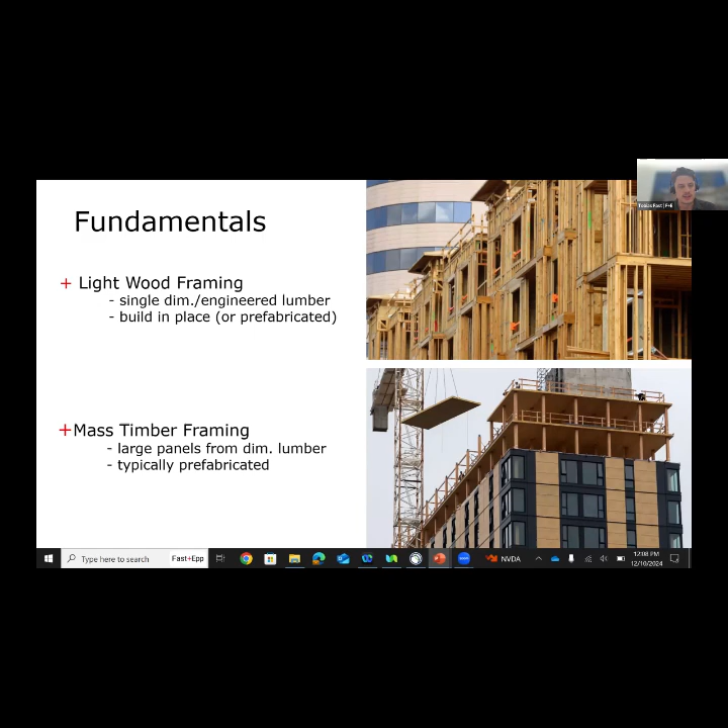Lightwood framing uses dimensional lumber, built in place, with some perhaps levels of prefabrication. Mass timber is large panels made from dimensional lumber. You're looking at very similar materials in the top and bottom photos, but one is prefabricated, one is larger dimension elements, with longer spans, higher capacities, and bigger buildings.

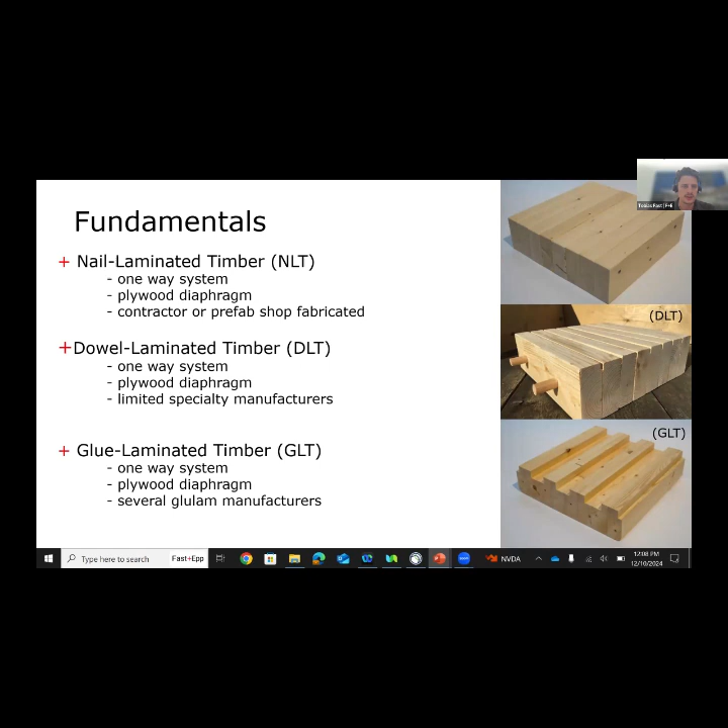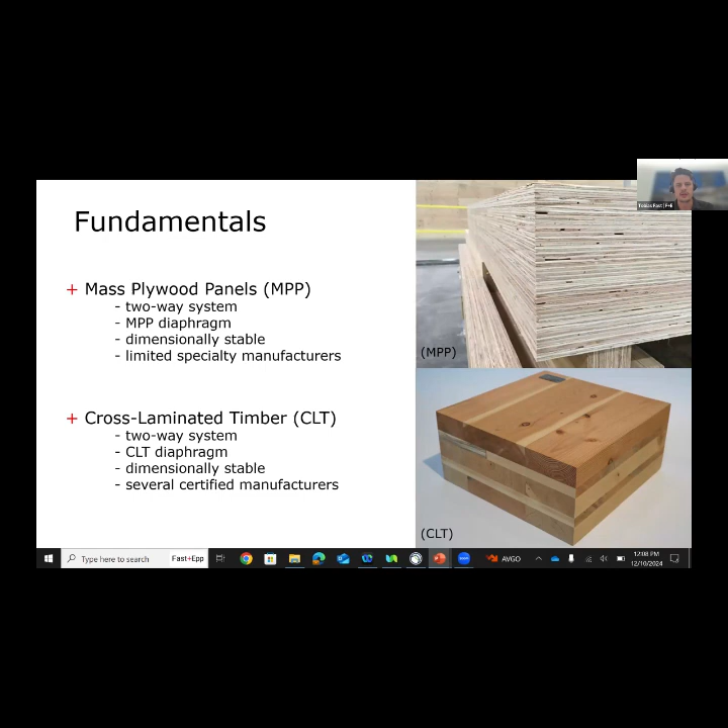You can break down mass timber as a broad word into a couple different panel types or material types. There's nail laminated, dowel laminated, glue laminated—all sorts of ways of laminating these things. Plywood is stick plywood glued together, and then there's cross laminated timber. These all make up what we call mass timber, and they're all fundamentally structural elements that compose a building's primary load-bearing structure. I won't go into depth on these, but these are different subcomponents of that space.

As far as gravity systems go, there's a range, but in general the bulk of buildings you'll see are formed in one of four ways. First is post and beam—it's kind of the traditional mass timber format, what you'd probably see down in old Gastown buildings, right? It's post and beam, a very simple construction type.

Full panel is a newer one—or the advent of it happened maybe several decades ago—but a larger, broader market share of full panel suppliers and producers now enables panels for floors and wall elements. Stick and panel is a nice hybrid, and you're seeing that around town with stick frame walls and mass timber panels for the floors. And then post and panel is something I'll share examples of shortly—it's sort of what you might compare with the traditional cast-in-place flat plate concrete systems.

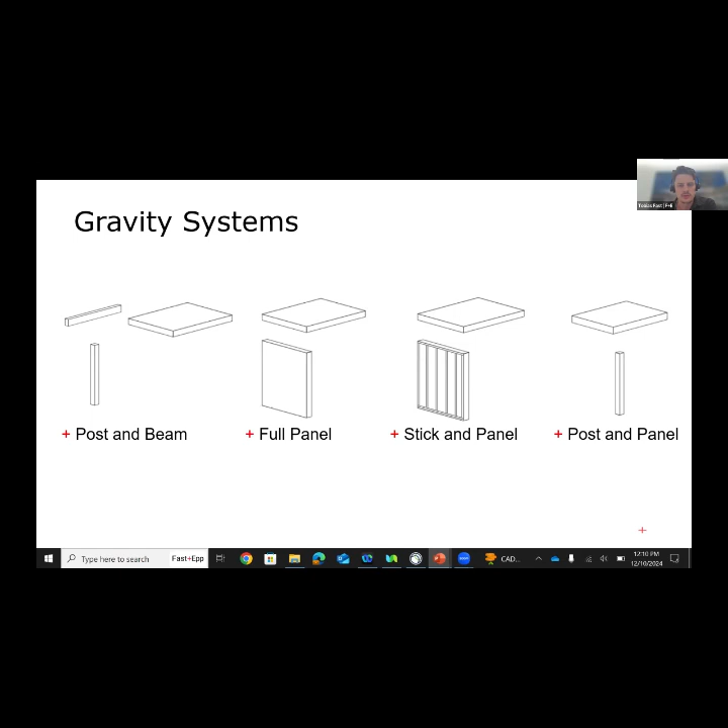That's being used in a lot of multi-unit residential mass timber construction right now. Grids are very important in this space.

Typical residential grids for a point support system, that's the last system I showed on the far right of the last slide. These are smaller grids, like 11.5 by 15. This is all dependent on the supplier and what they can produce. This is with no beams on the left-hand side.

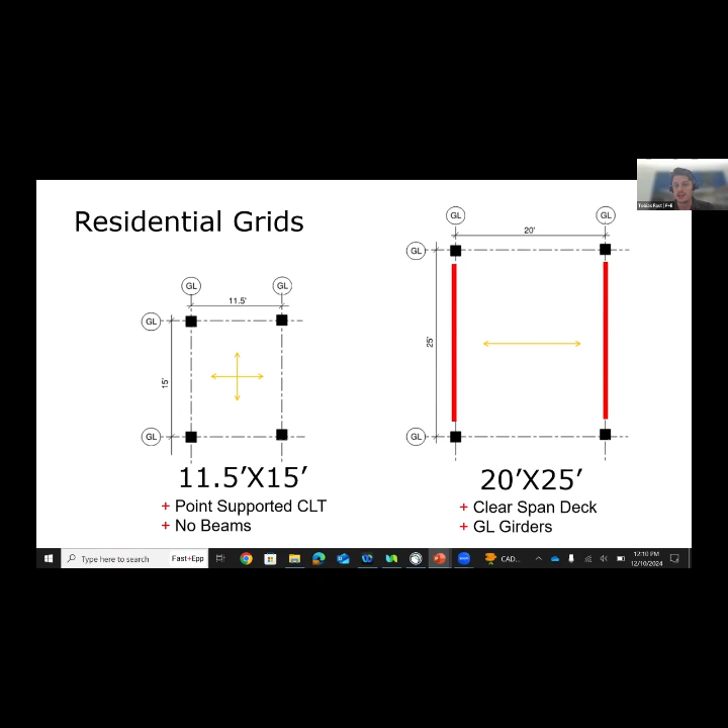You see more traditional post and beam grid, and it can get larger to 20 to 25 foot spacing. This is more in line with what you'd see in concrete construction, steel construction.

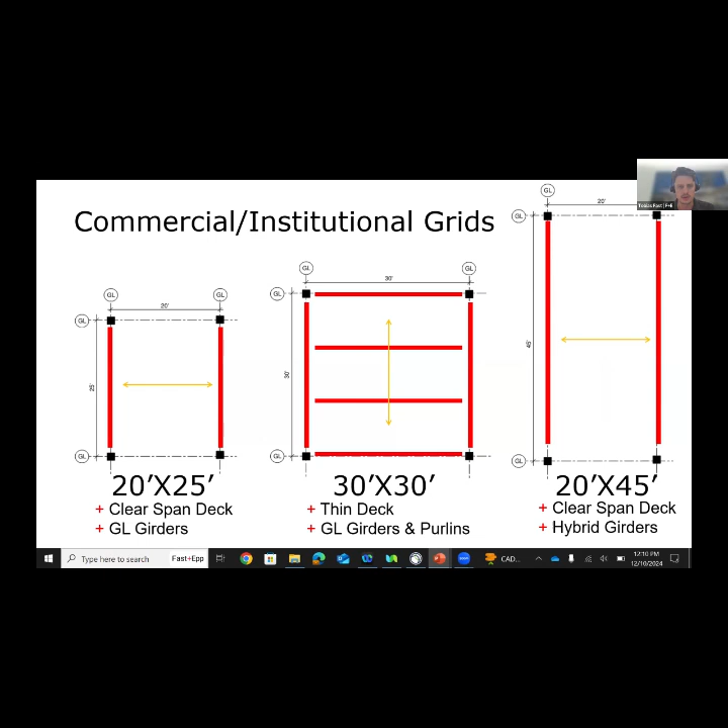On the commercial side, then you're going larger, you're going all primarily beam type systems, 20 by 25, 30 by 30, even larger if you really want. But really, the left two are kind of what you would see most commonly. These are traditional grids, what you'd see in the concrete and steel space.

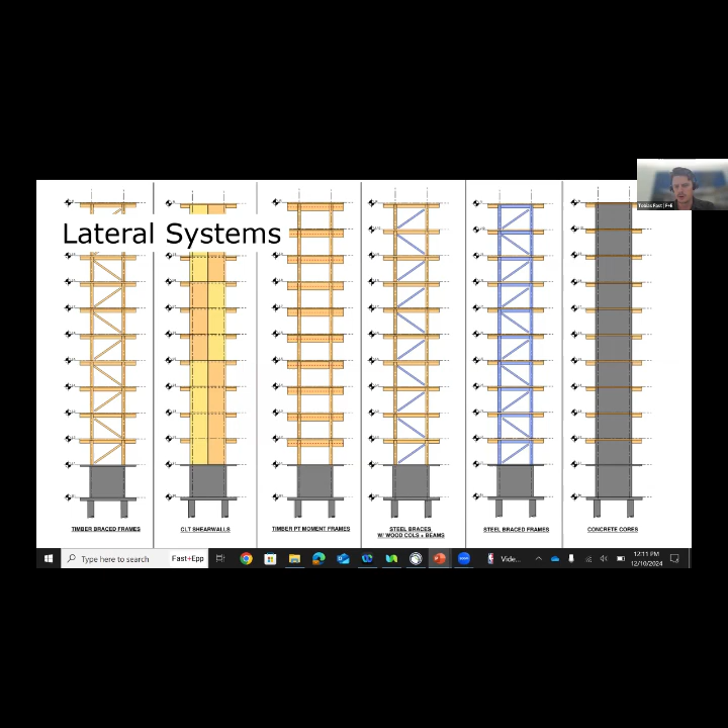But you can do timber frame systems. I'll show you one in a second. Primarily you'll see concrete core and steel frame systems.

Timber brace frames, you can see here, pretty self-explanatory. CLT shear walls for smaller sort of squat buildings - this is a nice way where the entire structure is just wood. We're doing this as the elementary school in the lower mainland.

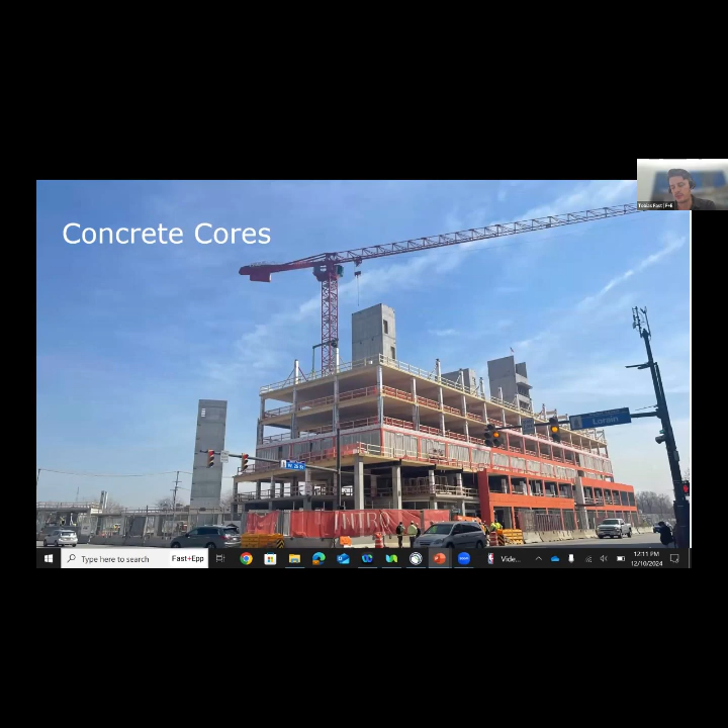Steel brace frames, we all know about this. And then concrete cores, like I said, especially in Vancouver, make up the bulk of lateral systems, even for timber structures.

Okay, structural connections, how they actually get connected together. There's myriad ways these buildings can come together, and columns and beams can get connected. I'm showing one type here.

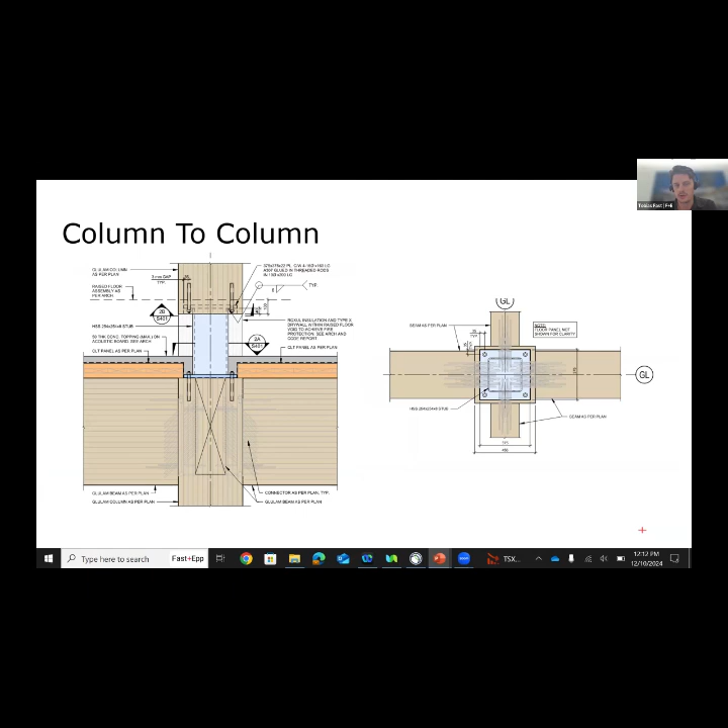These are form-fit hangers. You use these kinds of systems. These are pre-engineered systems, and really allow for no visual impact - you don't see anything, all you see is wood to wood. So that's a benefit. There's other systems, bearing systems.

On the positive side, you really have flexibility - if you have architectural preferences, if you have fire rating preferences or requirements, if you have fabrication considerations, one fabricator prefers one, you can go many different directions. Downside is there's not a lot of standardization right now.

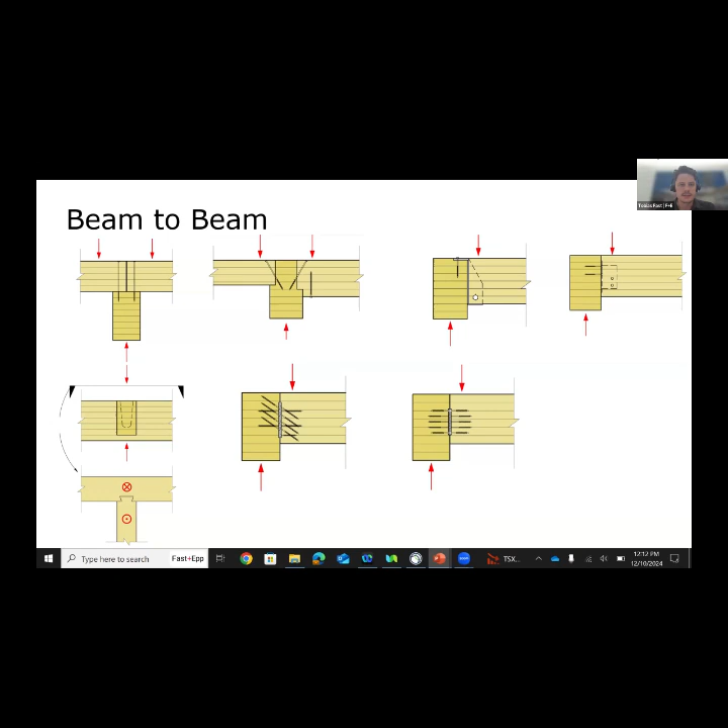And so look, all of these are possible. You have different screw kinds, screw types. It's just a bit of an open market in this space right now, but many different ways these can come together.

Here's an example of a form fit hanger with a Ricon. A lot of these came out of Europe - Central Europe, Germany, Switzerland, Austria - and have now made their way over here, as well as some new connectors on the market by local suppliers.

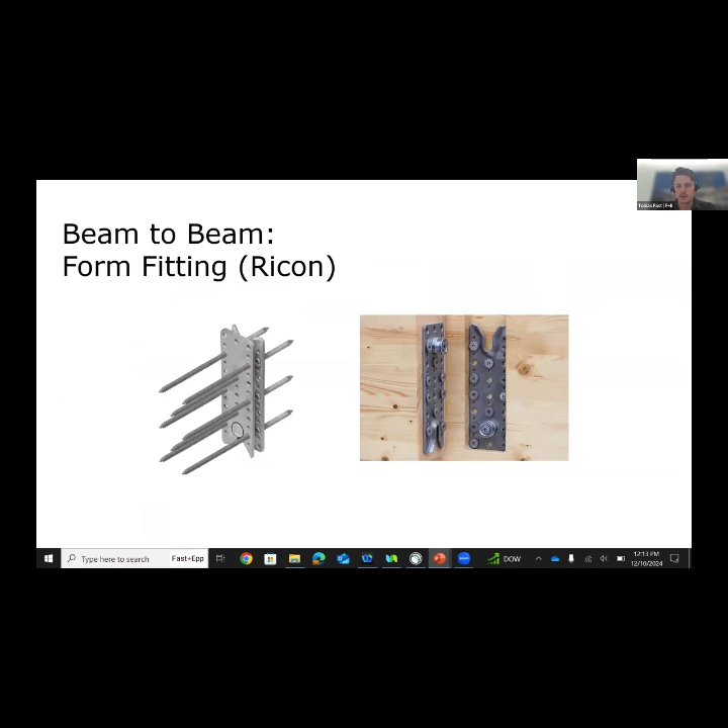Column base is just fairly simple - just get the load to the ground. Generally, some manner of steel or aluminum is involved in the connections here.

Okay, into supply considerations. So these all come from logs, and we have a big, massive forestry industry here in British Columbia, obviously. However, that doesn't give you the full picture. A lot of the timber projects here are supplied locally, but certainly not exclusively.

Throughout Canada, we have Nordic, Element 5 out on the East Coast, Western Archrib supplying Glulam from Alberta. In the United States, you've got some more options, including several just south of the border. And in Europe, there's a whole other range that's been going on much longer than it has in North America, so the supply market's a bit more mature and developed there. It's not out of the picture for these suppliers to bid competitively on projects in North America, especially on the East Coast more so than the West Coast.

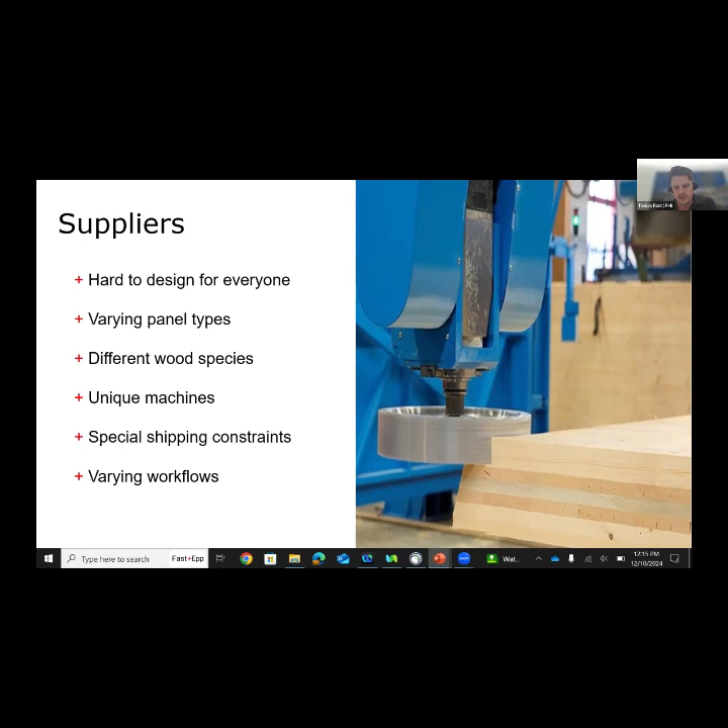Shipping comes into it too. These panels are often limited by keeping elements within the size of standard shipping lengths, widths, and heights. So even though the panel supplier can supply something bigger, the truck is often the limiting factor.

Anyway, there's a whole world in there. We've got only a handful of minutes here, so I won't get too deep into that, but I want to look at a few case studies which might be of most importance here.

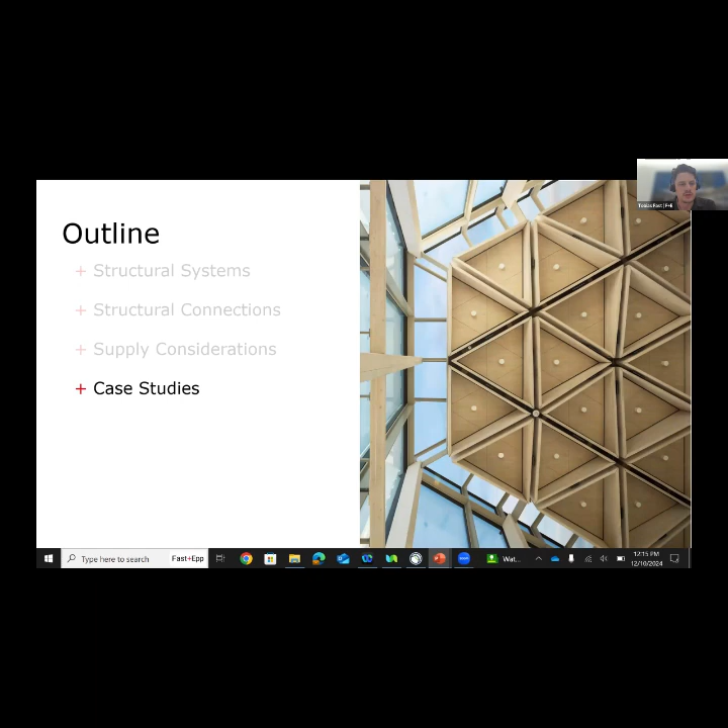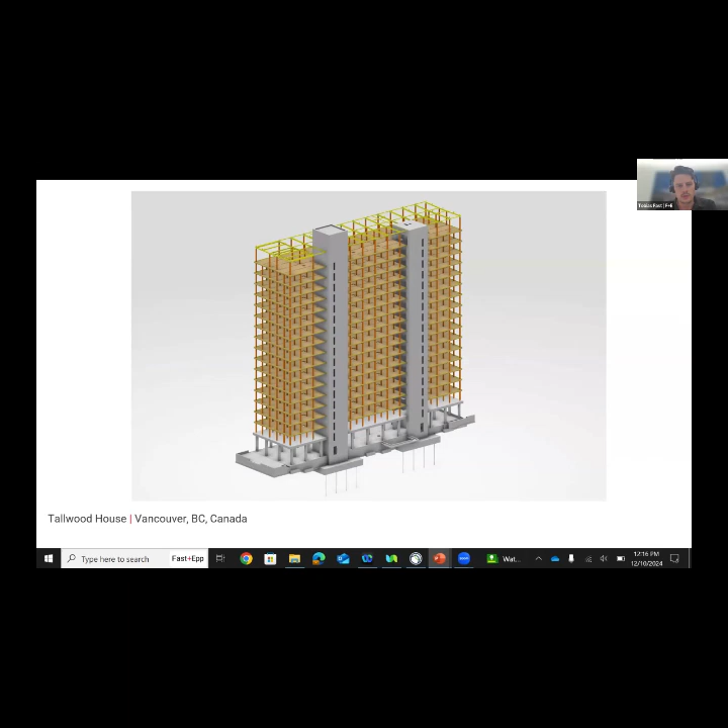The first one is an older project, as far as mass timber in the Vancouver area goes—getting close to 10 years now—this project was topped out. This is Tallwood House at UBC campus in Vancouver. You've probably heard about it; it was the tallest mass timber structure in the world at its time, before being eclipsed by a Norwegian project. This was all using point-supported CLT.

This is a student residence building, and you'll see this often for developers considering multi-unit construction taller than 6 stories. This is a good option. You see a lot of columns, set at the edges of the panels, so it's your panel width that determines the grid of columns you'll have.

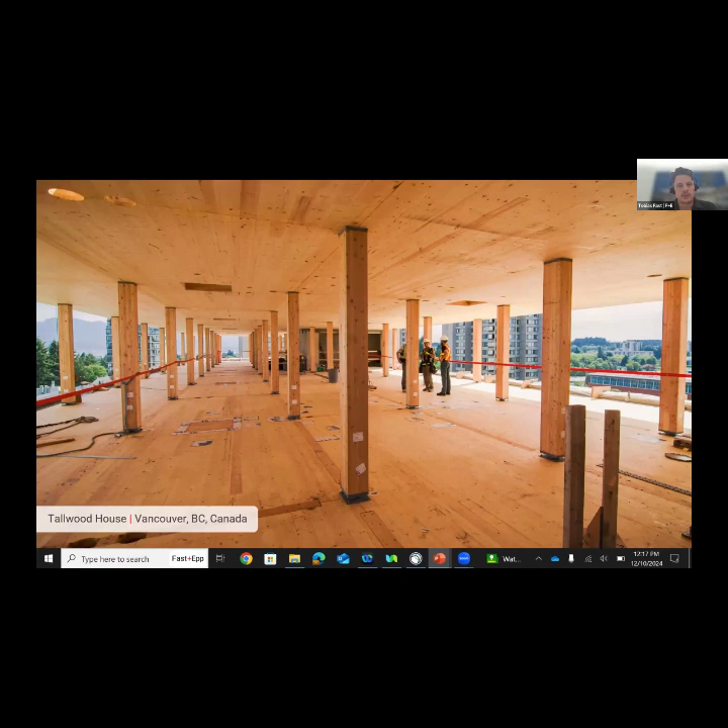This is a beamless system, and it gets as close as possible to that 3 meter Vancouver classic, or 2.9 to 3.0 meter floor-to-floor height. That's with roughly 6 to 7 inches of CLT for your floor structure, with topping on top.

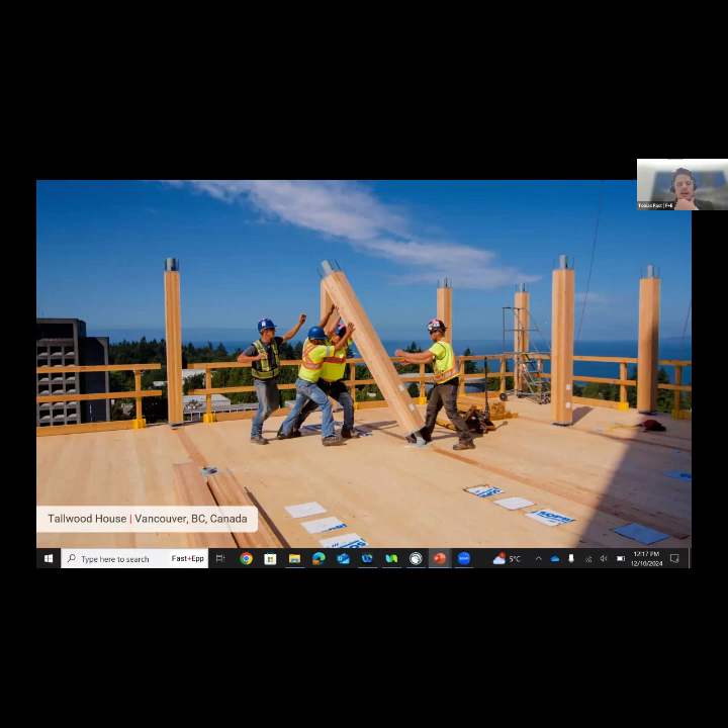This building was very successful. It came in quite competitive against cast-in-place concrete, which was the benchmark for it, and really set off quite a large movement in this space. Prefabricated wall panel systems all went together quite nicely and quickly.

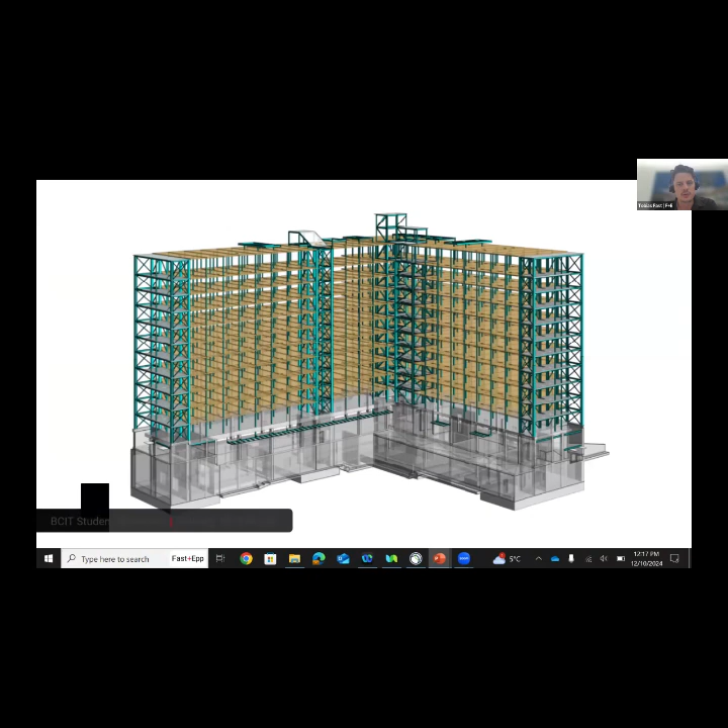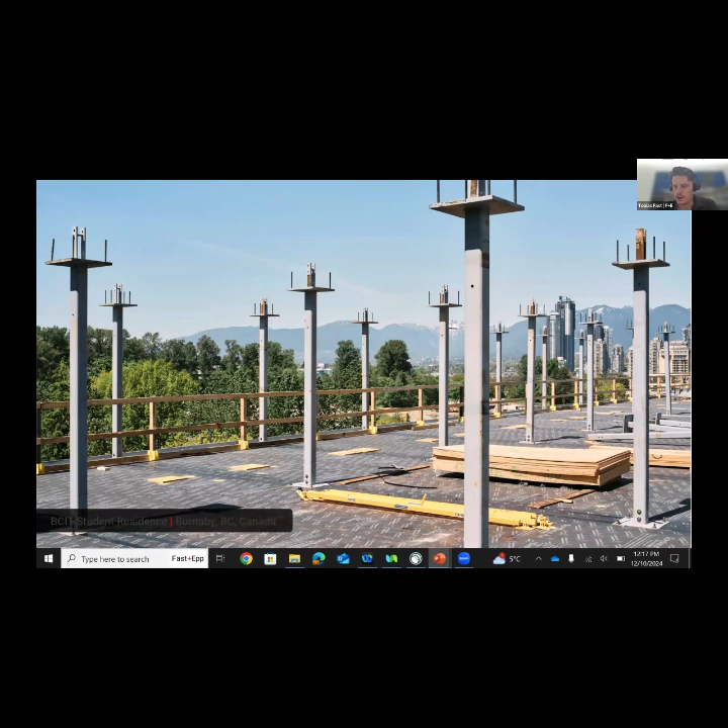I'll keep going, I think I'm running behind here, but this is BCIT—sort of a second generation project. This is the student residence building which just topped out recently on the structural side. This is 11 stories, out at their Burnaby campus. This is the same system except with steel columns, which allows narrower dimension columns that fit within the partition walls. You can see all the columns stood there, single-story columns, 4 bolts for the connection to the next column.

Waterproofing on this project was the Cadillac version, the highest level of temporary moisture management, which is a big deal as many of you know. A fair amount of money was spent on this one, and it worked well—shop-applied membrane, sealed the splines, checked the moisture content before sealing things up, all that good stuff.

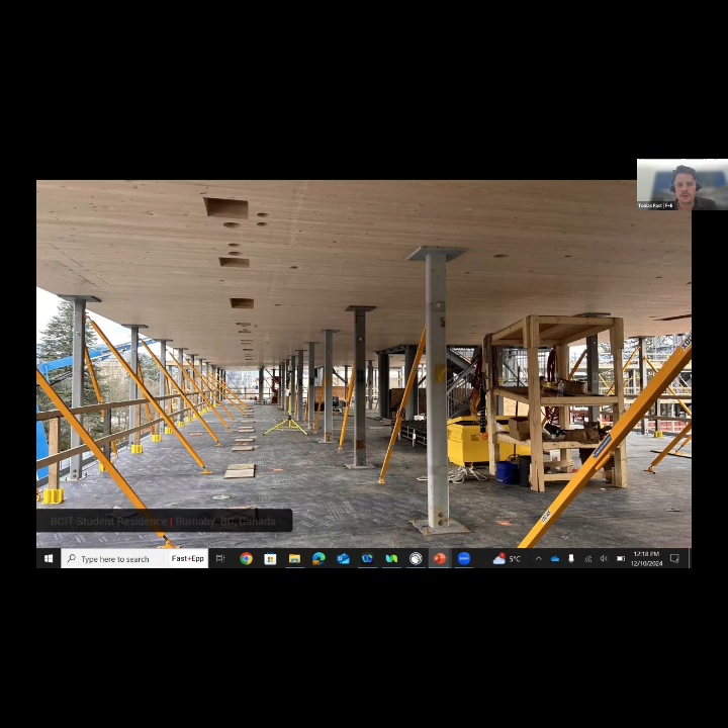Steel braced core on this one. The whole core was prefabricated ahead of time, in 2 lifts, I think—4 stories roughly per lift—and then installed in time so the crane could be done.

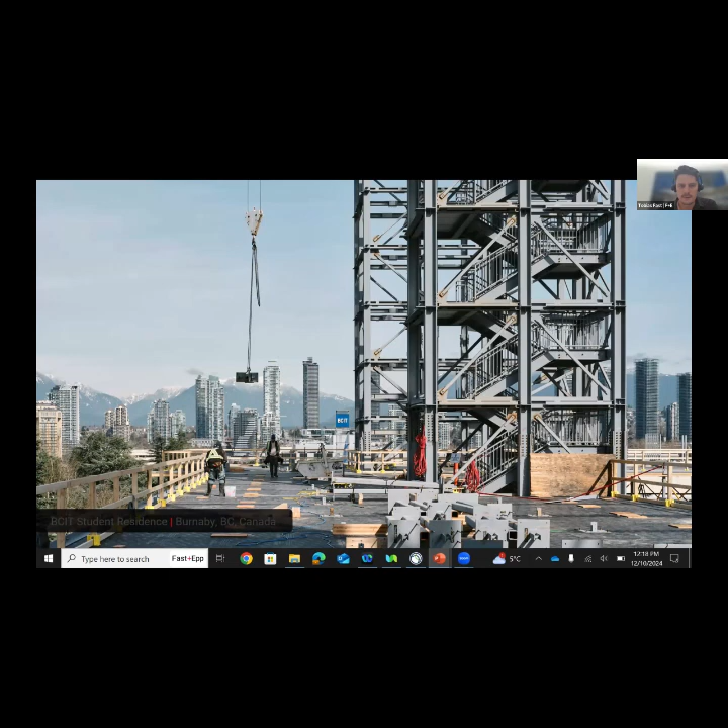And could focus on flying timber panels and steel columns like you see here. The Flynn speed wall system for the exterior curtain wall went really well.

That's the sort of small unit residential space for student housing, social housing, smaller condos—that's where you'll see that. There are a few more of those in the mix right now in various stages of design with private and public clients. Lastly, I'll talk about the Hive.

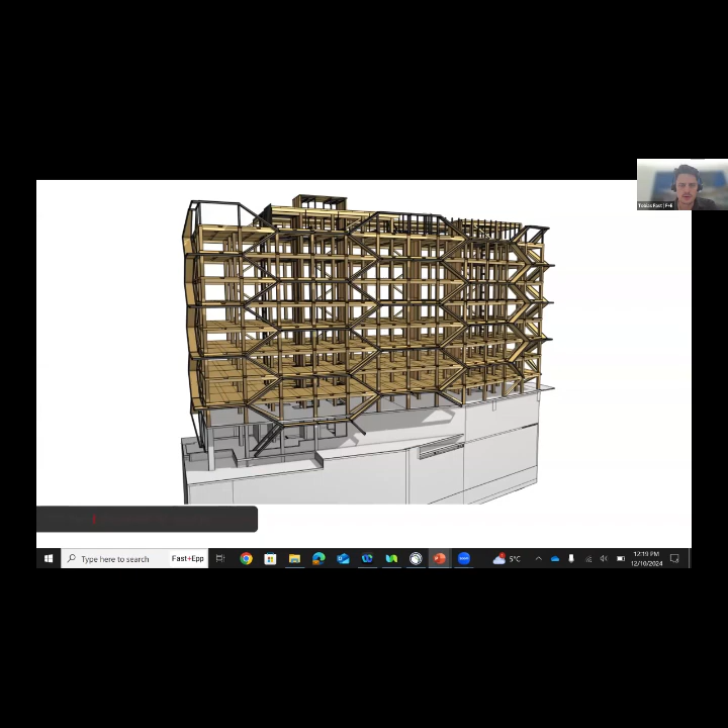This building is structurally topped out now. This is in East Van here, and this is an all timber—there's some hybrid elements, but primarily a timber structure. This is where ICBC is going to be moving in. It's been developed by the Nature's Path group. This is glulam timber installed on site by the iron workers.

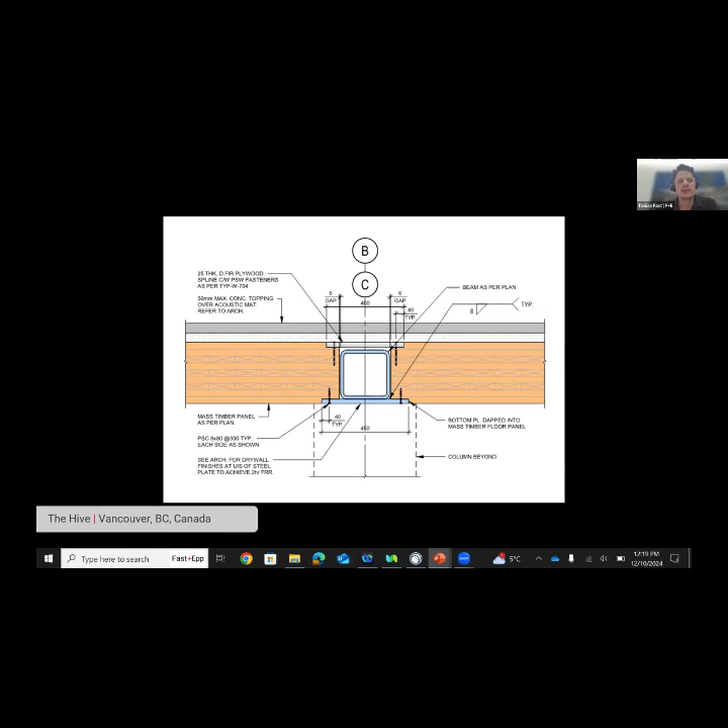Clear spans all the way across the quarters, a three-bay building. There are flush steel beams—custom fabricated to support the panels at the edges, or the inside, I should say. It's a steel or timber braced frame system, the tallest timber lateral system in a high seismic region right now. Quite innovative. These innovative dampers, which we also have in our building here, Fast + Epp's home office building, allow high levels of energy dissipation for a damage-free structure post design earthquake event.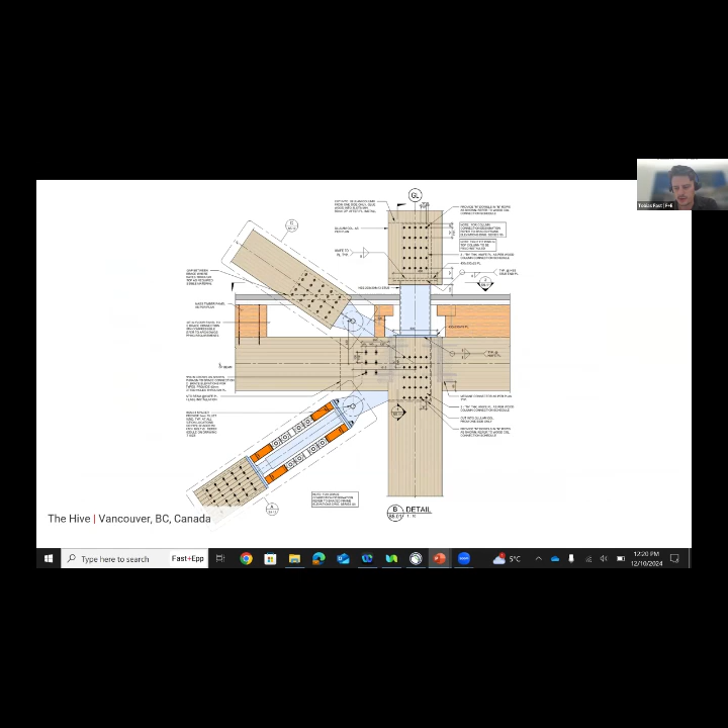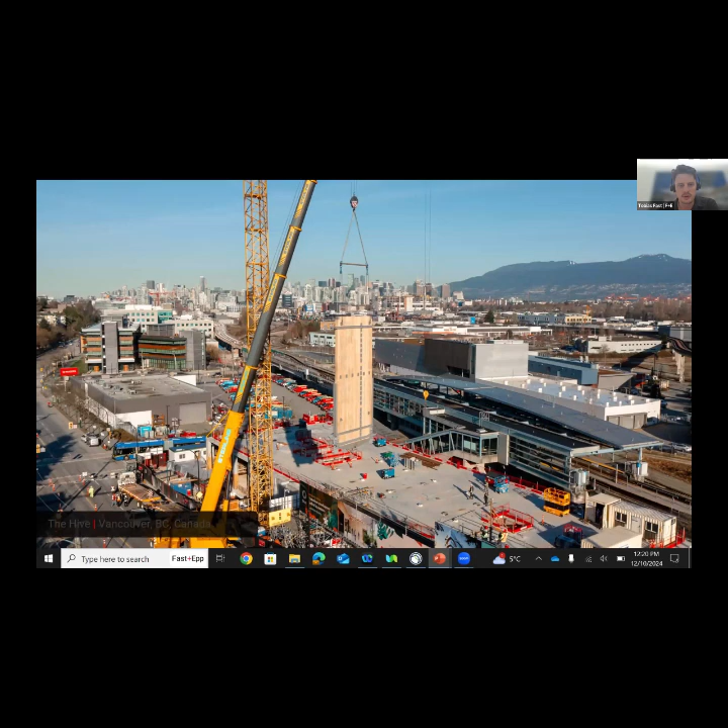CLT shear walls as well, with lots of testing and research done on these using a unique rocking base system. You can see those prefabricated panels getting flown into place. This building is now much higher than what you see in these photos, but it looks quite stellar.

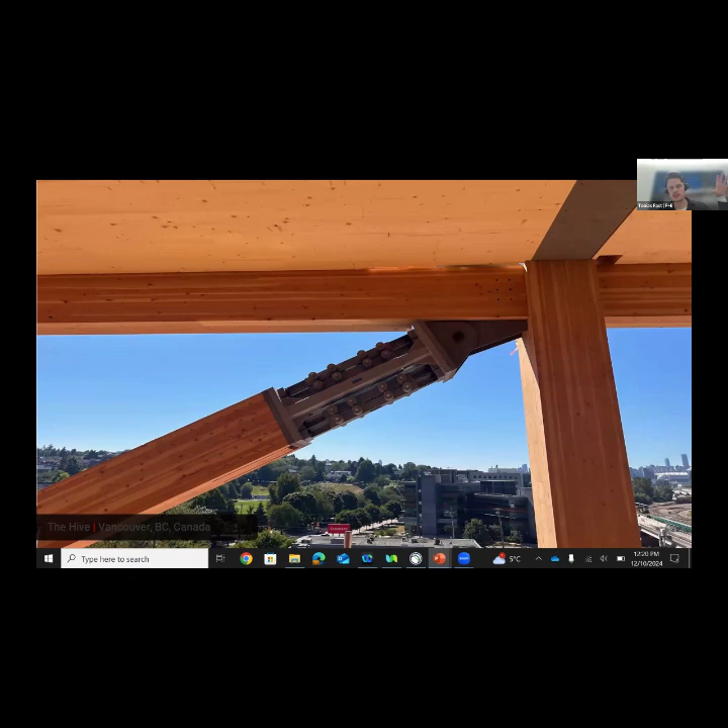This is kind of the other end of the spectrum as far as mass timber structures go. I showed you the most cost-effective way of going for taller timber buildings on the residential side. On the commercial side, you can get spans like this to create premium interior space using timber. That's it for me.

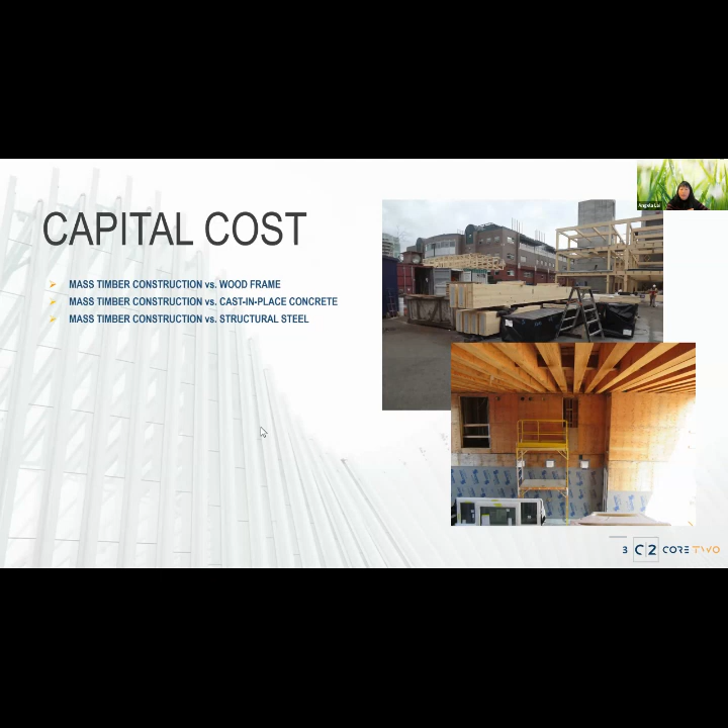With mass timber and steel, steel is one of those materials that will always have a cost premium, particularly regionally in BC—there's about a 6 to 8% cost premium for mass timber over steel. However, I must say I haven't come across too many steel buildings; the favorite choices tend to be wood frame and concrete.

So in terms of timelines, the question I always get asked is whether one is going to be much faster than the other. Mass timber is a modular system, just like others, so it can be 5 to 10% faster than wood frame. But stick frame is moving to a panelized system, which can be a lot quicker—that's the study I'm working on, the CMHC Level Up project, where we're looking at doing things faster and more efficiently.

Now, the one comparison I always get asked about is concrete versus mass timber. Mass timber can be 30% faster, particularly on site. Once you bring the systems onto site, it's just like Lego, putting the pieces into place.

One of the projects Tobias mentioned was the Brock Commons project, an 18-story student residence—they built it really quickly. But you have to consider the upfront design and prefabrication, which can offset the actual time on site, because fabrication could take months even though the on-site part is quicker. And even though it might be quicker, there are logistical issues: making sure you have the team in place, making sure there's storage space for materials, and so on.

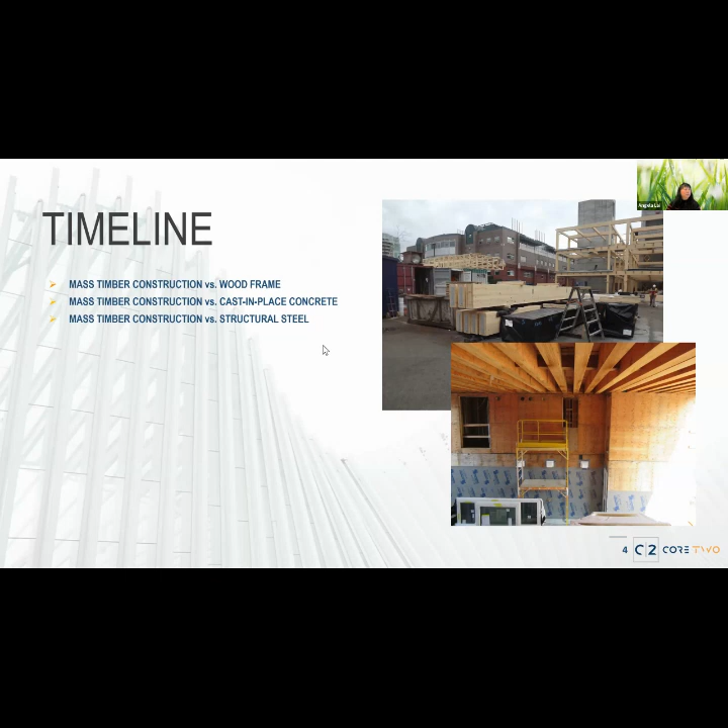Now I have the life cycle piece here, which is an area of particular interest and expertise for me. The thing is, it's structure—so unless you're going to demolish the building, it's not something you're really going to be considering. In terms of the life cycle piece, which is mostly interior finishes and mechanical systems, that's probably going to be very similar for all three structures.

Obviously, the advantage comes when the building is demolished—what pieces can actually be salvaged and reused, which is obviously less in the case of concrete. But for me, it's more about the life cycle assessment, the embodied carbon of mass timber. There isn't really a good benchmark for mass timber versus concrete yet, since we're still doing a lot of life cycle assessment, but there's definitely a lower global warming potential with mass timber than with concrete.

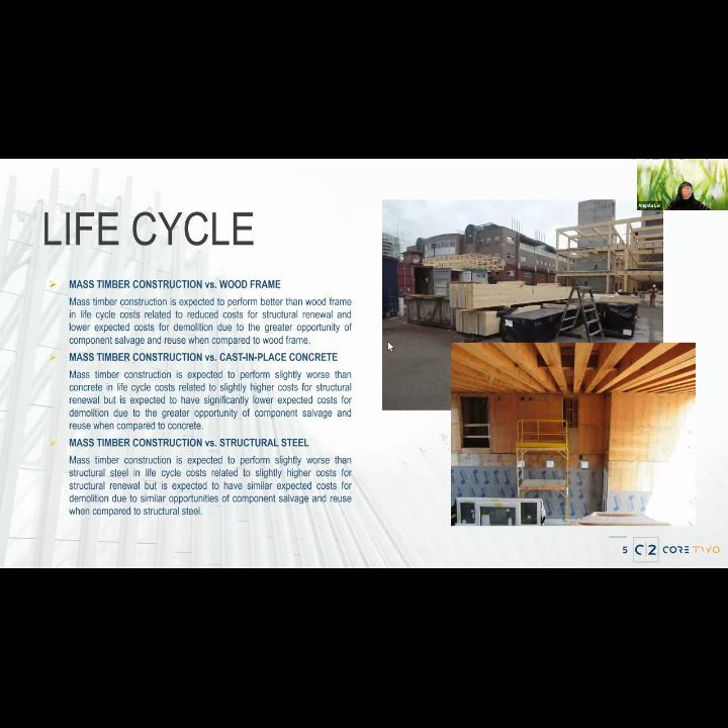I match with Tobias' slide there in terms of all the suppliers in Canada. Even though I said we're moving towards using more mass timber, there's a limited amount of supply—of all those suppliers listed, only one is actually based in BC, which is Kalesnikoff. They're based in Castlegar, BC, and I'm using them for one of the projects.

Structurlam was bought by Mercer. We also have Nordic in Montreal, Quebec and Element5 in Toronto, and Western Archrib in Edmonton, Alberta. So my point is, yes, we can use mass timber, but there's a limited amount of supply, which is one of the things adding to the cost premium of mass timber.

There's the Height Building, a project we were working on as a third-party payment certifier. The key things in terms of procurement of mass timber suppliers are pre-qualifying contractors and making sure they've worked with mass timber before, because if they're new to it, it's going to draw a cost premium. The other thing is your on-site logistics and making sure that's all in place.

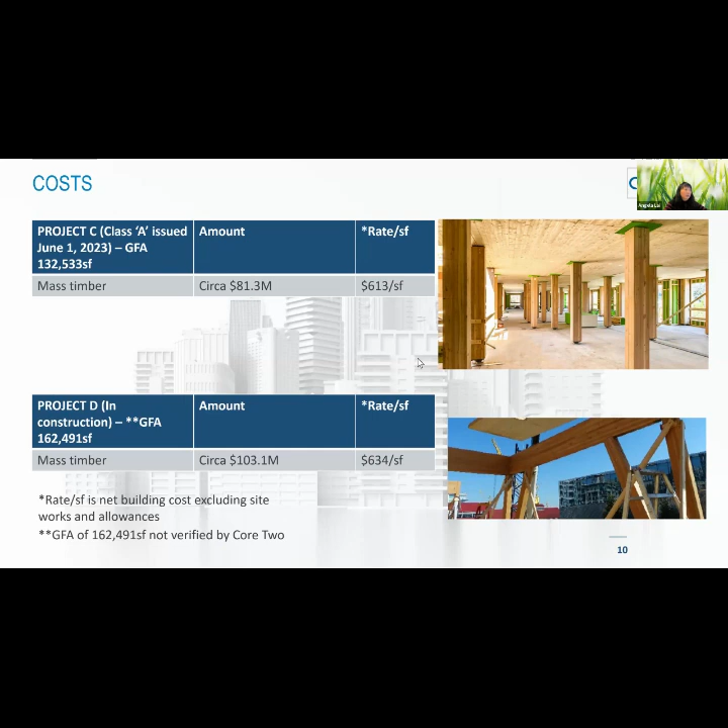Thank you. Trying to share my screen here. Are you seeing the screen? I actually have to stop sharing—sorry about that.

Can you see my screen? Yep, we can see it. Good, thank you. Good afternoon. Thanks, Angela. Just very quickly—oops, no, I'm not.

GHL is a fire engineering firm involved in mass timber, working on most of the projects that Tobias and Angela mentioned. We base our design on fire engineering, and we had a significant amount of research behind it.

First, a quick territorial acknowledgement. We respect that our work takes place on traditional unceded lands across the province.

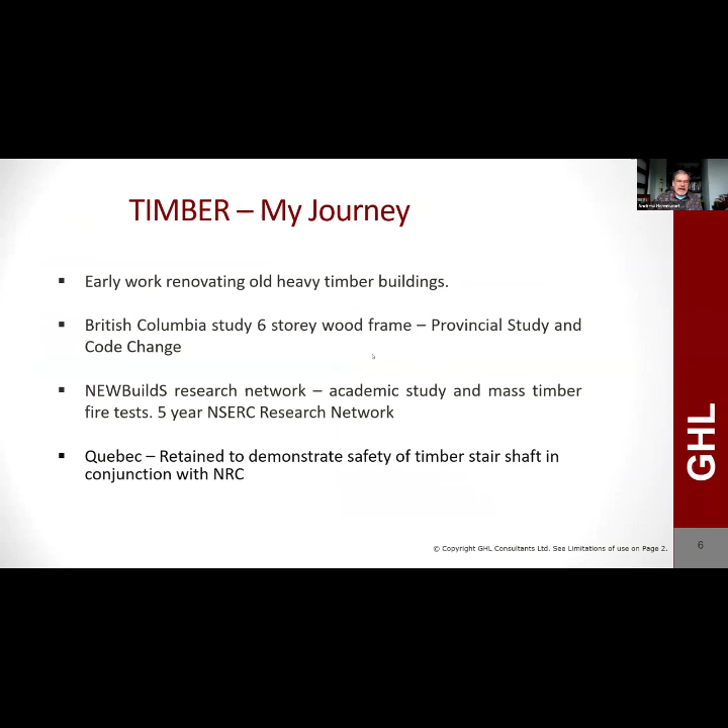My background is civil engineering and fire engineering. I have a master's degree in fire science from UBC, which they offered for only a short period. I started my work with a lot of old heavy timber buildings, and that's what created my passion for it. We did some studies on 6-story wood frame buildings, and I've had multiple research backgrounds. Research is very important to understanding how wood frame and mass timber buildings work, with heavy committee involvement. Some of the buildings I worked on include UBC Brock Commons, which Tobias mentioned - a very early building.

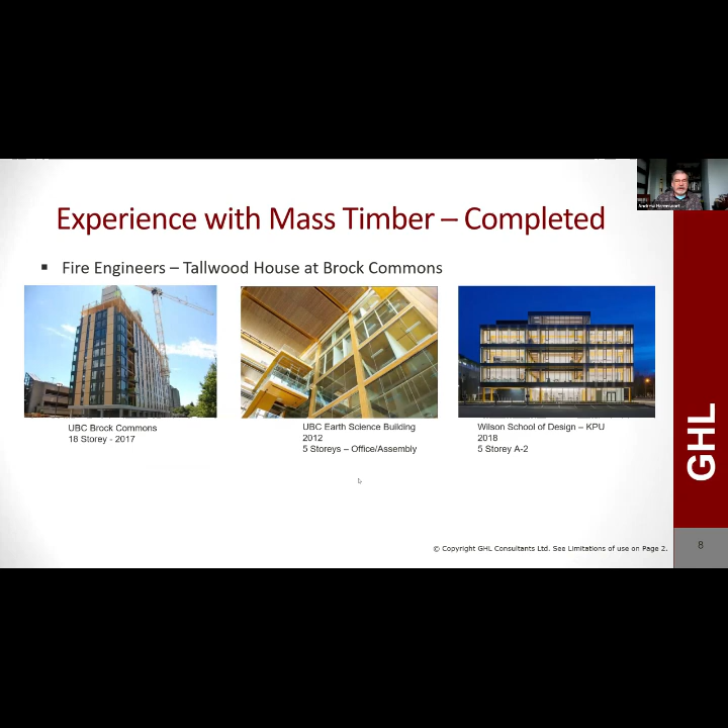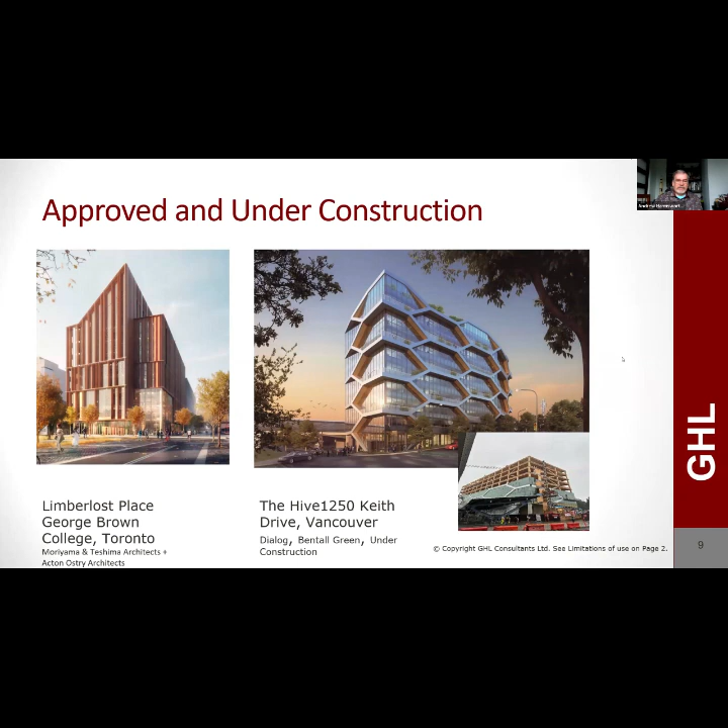We're working on Limberlost Place in Toronto, a 10-story fully exposed mass timber building, as well as the Hive, which Tobias also mentioned. There are actually relatively few buildings of this size that have proceeded, so it's a very small market with a limited number of experienced people.

A little background on fire testing - this is one we did in Richmond to demonstrate to authorities, code officials, municipalities, and firefighters. We burned a sample of light wood frame construction, both completed with fire rating installed and uncompleted during construction, alongside a similar mass timber building.

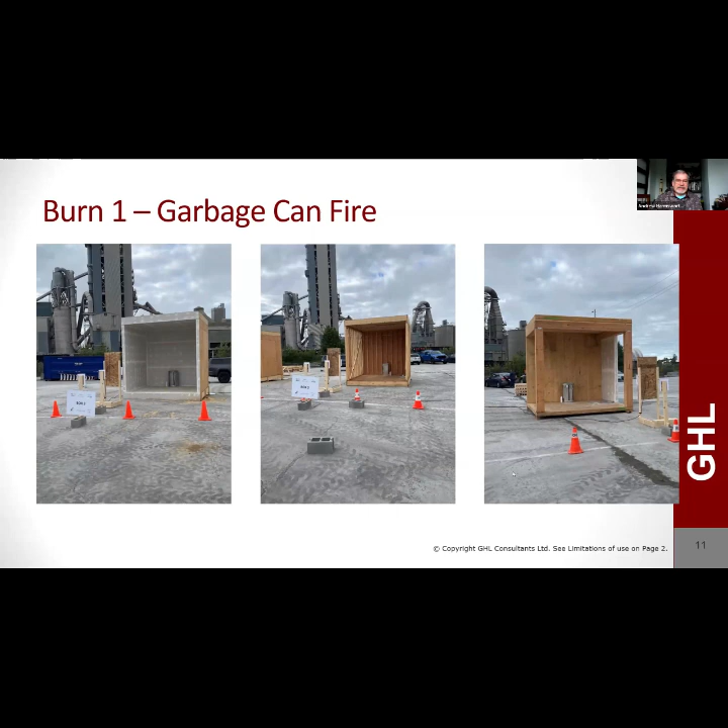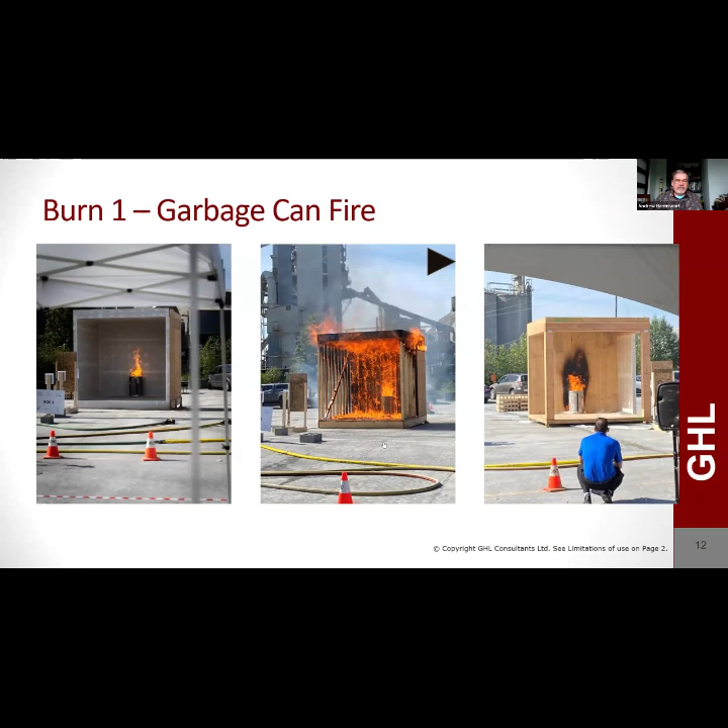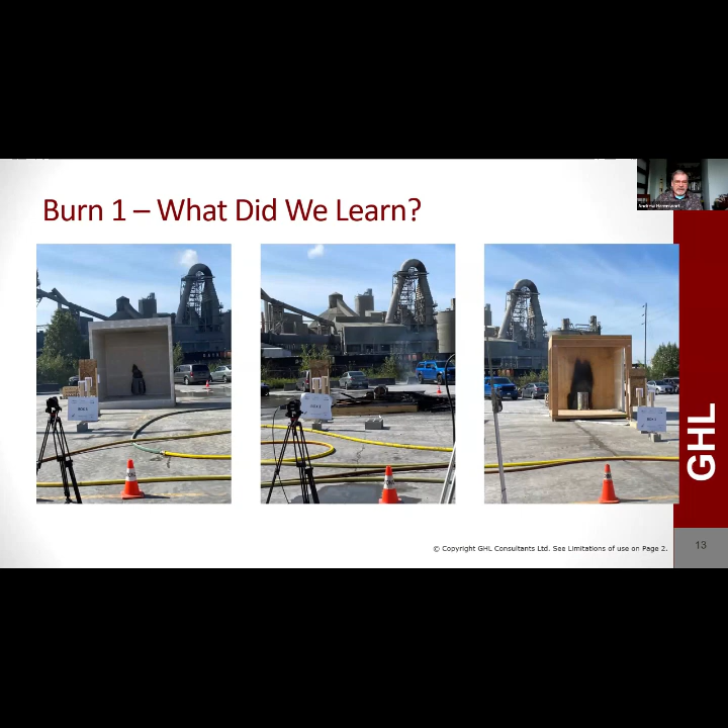This shows very clearly the difference. The light wood frame building burned up in almost no time, whereas the other two survived quite well. In the end, the mass timber building, although everything was exposed, had the garbage can fire burn out and just char the back panel.

This is another large test, done in Ottawa in June 2022, part of a large provincial-national study with 6 provinces and the federal government contributing. This was the largest office structure test - it effectively mimicked a fully furnished office, though we couldn't burn plastic, so everything was done in timber.

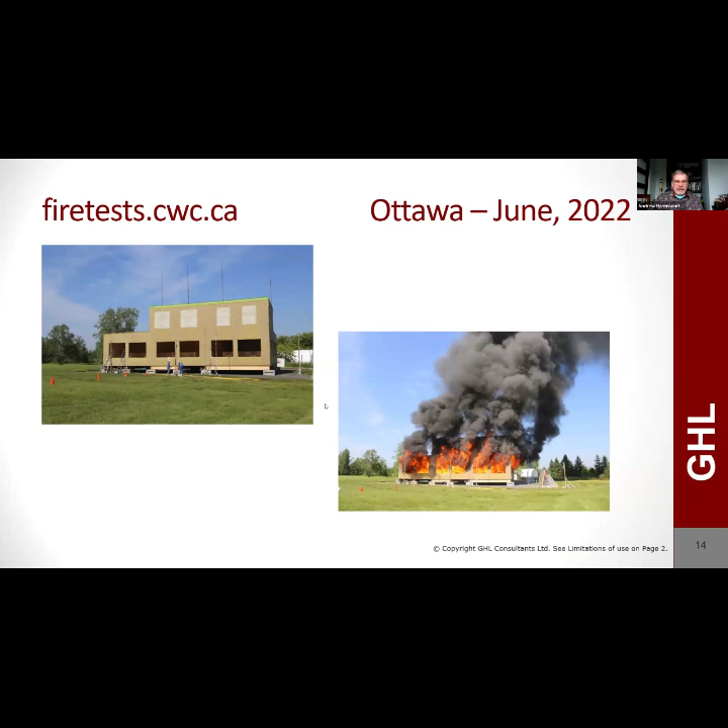It burned for about an hour. Towards the end it actually burned out, and the building remained fully standing. The report noted the elements were largely self-extinguished within the first hour. The test continued for 4 hours to monitor any reignition or structural failures, and the building survived - they actually did 3 more fire tests in that building.

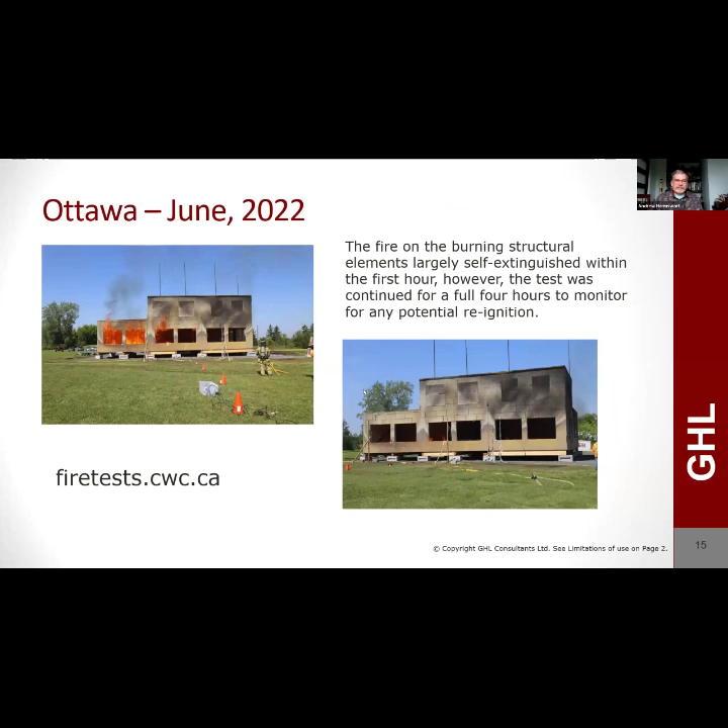Some major changes happened in BC recently. In the spring, we increased the size of buildings allowed to effectively match US codes. We had an anomaly where BC built the 18-story Brock Commons building in 2016, yet our national code only allowed 12 stories, whereas the US studied what we did at UBC and added 18 - so now we have 18 stories.

Exposed ceilings are permitted up to 8 stories. The city of Vancouver does not yet permit exposed buildings in residential construction - their concern is that they may be modified or changed by occupants. I'm not sure how realistic that is, but that's the concern, along with the fact that they cannot inspect residential units.

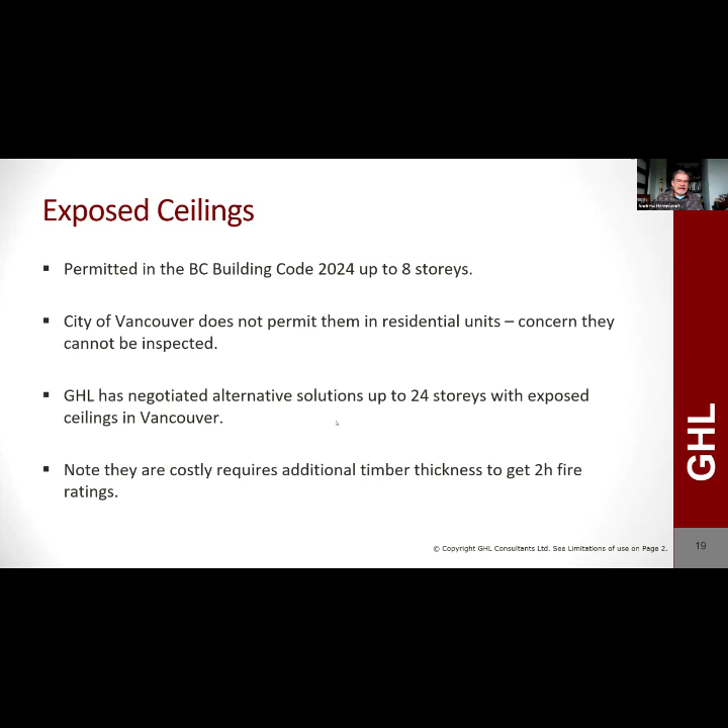However, we have negotiated alternative solutions up to 24 stories with exposed ceilings in the city of Vancouver. The problem with exposed ceilings is it requires significant additional timber. One big change addressed a lot of concerns with the requirement to encapsulate the building - protecting it with gypsum wallboard as you construct. They've now changed the code to provide options, and we've done that as an alternative solution in many buildings in Vancouver.

Talking about encapsulation - the fundamental concept of mass timber buildings initially was that all the timber would be protected with drywall, with 2 layers of drywall to protect it for approximately an hour. I won't get into all the complexities, but the fundamental idea is that part of your protection comes from the gypsum wallboard, and part comes from the timber, not all of it.

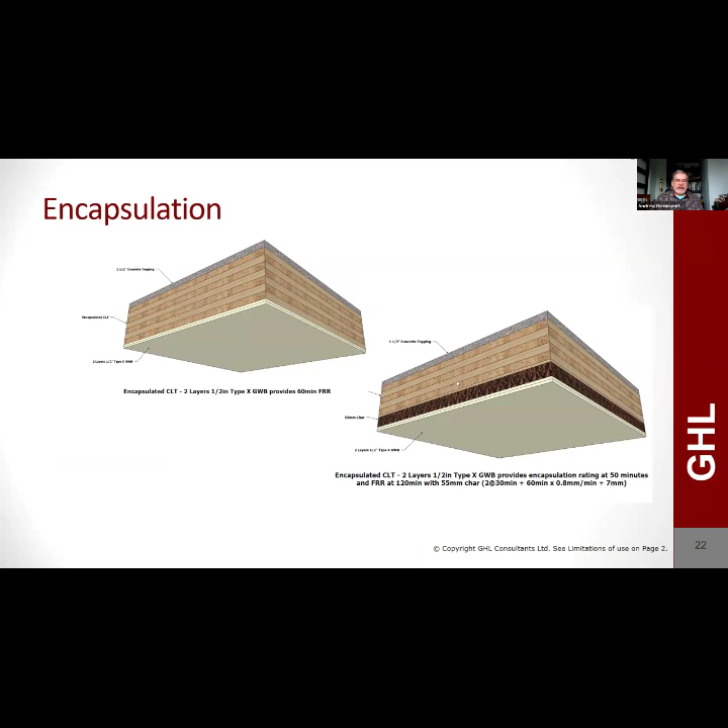This gives options and economic considerations that need discussion, and the carbon balance may be part of that discussion. You can have full encapsulation, assuming no char is allowed, which would require 3 layers of 5/8 type X or 4 layers of 1/2 type X gypsum wallboard, and then you get no char in the timber.

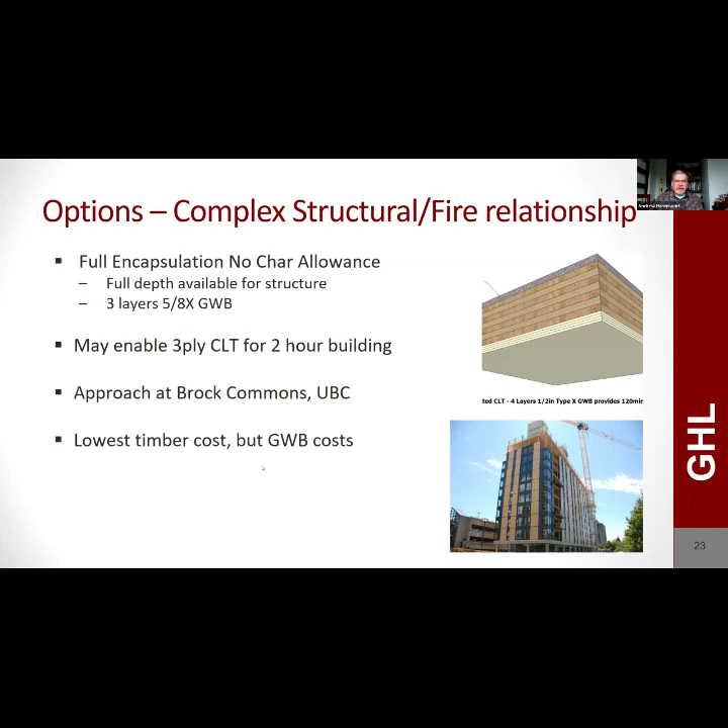It might enable you to do a 3-ply CLT, that is a 5-inch CLT panel for a 2-hour building. That's the approach we use at Brock Commons at UBC: 3 layers, 5/8 type X gypsum wallboard. Lowest timber cost, high gypsum wallboard cost, and the carbon impact is of course greater.

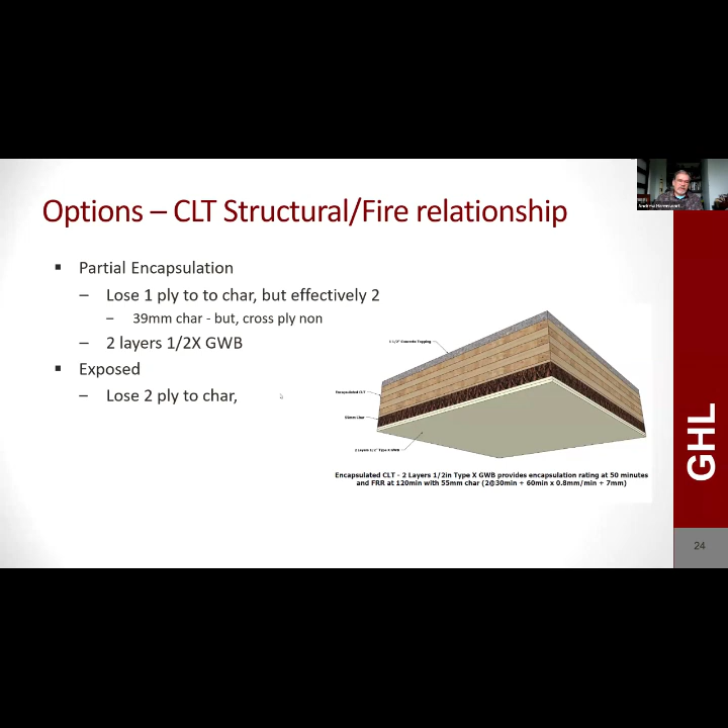Most of the buildings that currently are 2 layers are a hybrid. They have some protection by gypsum wallboard, some protection by char, 2 layers of 1/2 inch. So you lose 1 to 2 plies of your CLT to char. Not so significant with other types of timber, but you always end up losing some timber to char. Fully exposed buildings are now permitted up to 8 stories for residential and office, but you lose a significant amount of char, 90 millimeters of timber.

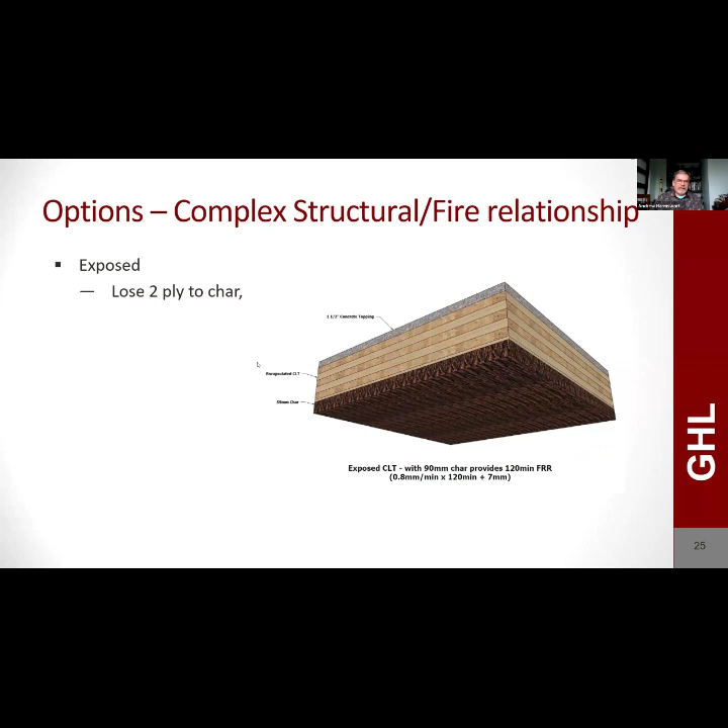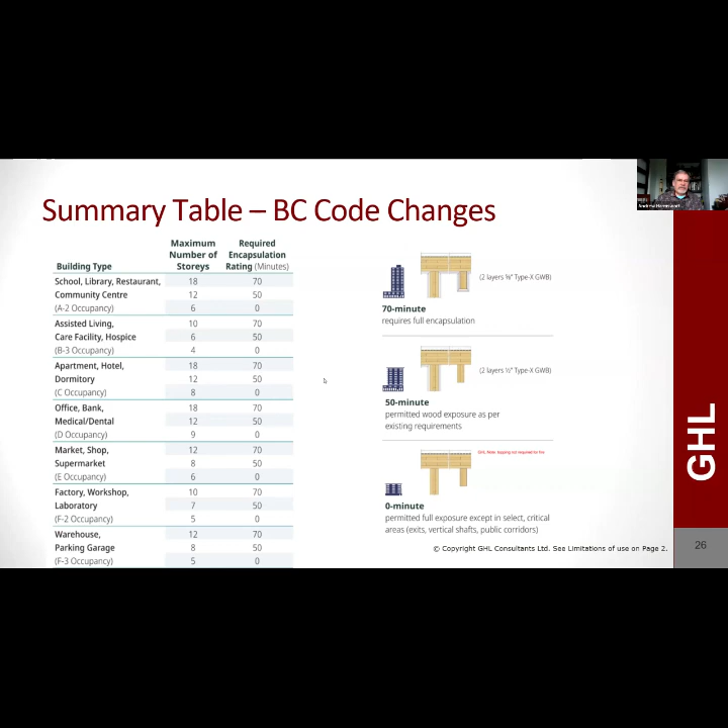This goes back to the table. What they came up with was for a residential building, we look at the 3rd line there, apartment hotel, 18 stories, 70 minutes of encapsulation. So that requires 2 layers of 5/8 type X, up to 12 stories, 2 layers of 1/2 inch type X, and up to 8 stories, no protection, to give you an option and a scaled approach.

Connections are a big issue. Connections in these buildings need to be protected, and we really have very little guidance on connections and very little testing. Protection by basically 4 inches of timber or gypsum wall, 2 layers of gypsum wallboard is required for steel protection, the only really tested protection method. Protections require a lot of very careful design and interface between the structural and the fire engineers on the project.

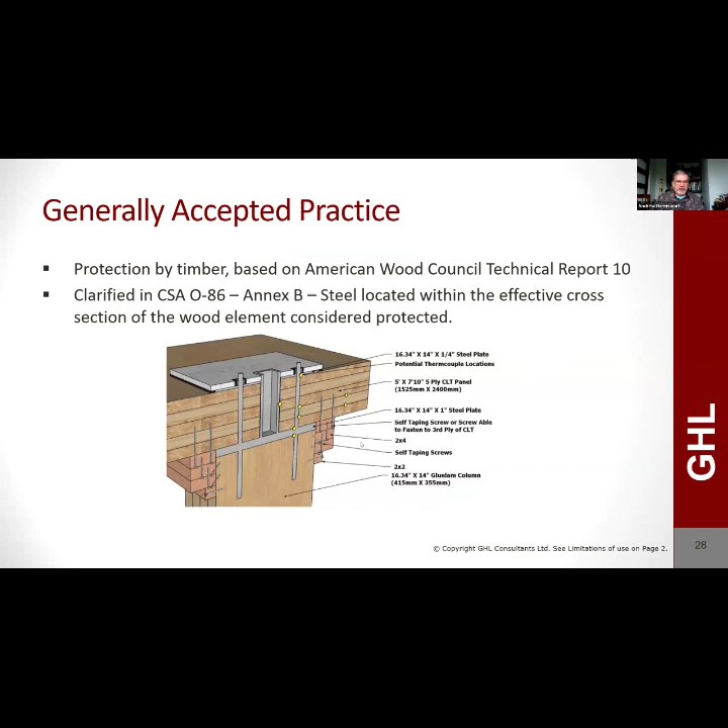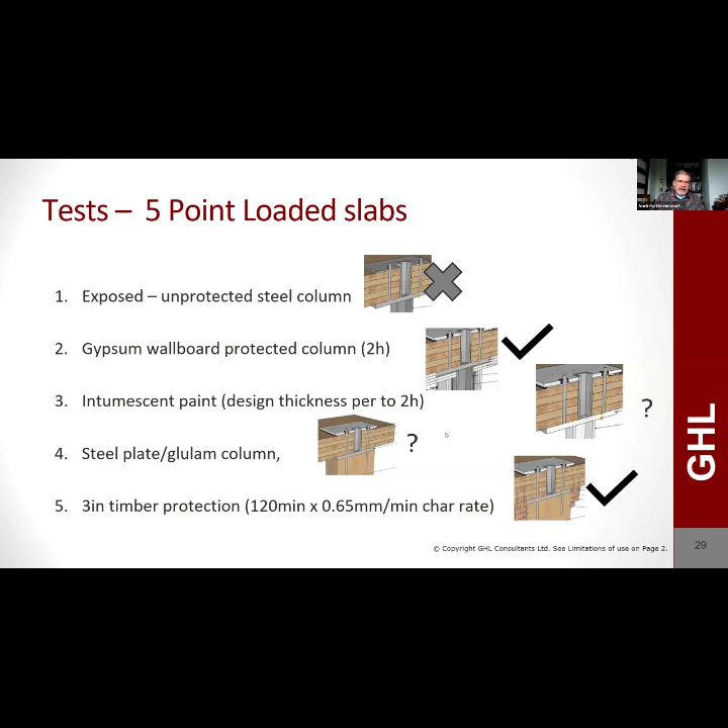We did a series of tests of connections, unfortunately not loaded. Testing is a very expensive process and we're always looking for money. But we looked at exposed unprotected steel column, gypsum wallboard protected column, intumescent paint, steel plate hidden inside the timber but with the edges exposed, and 3 inches of timber protection.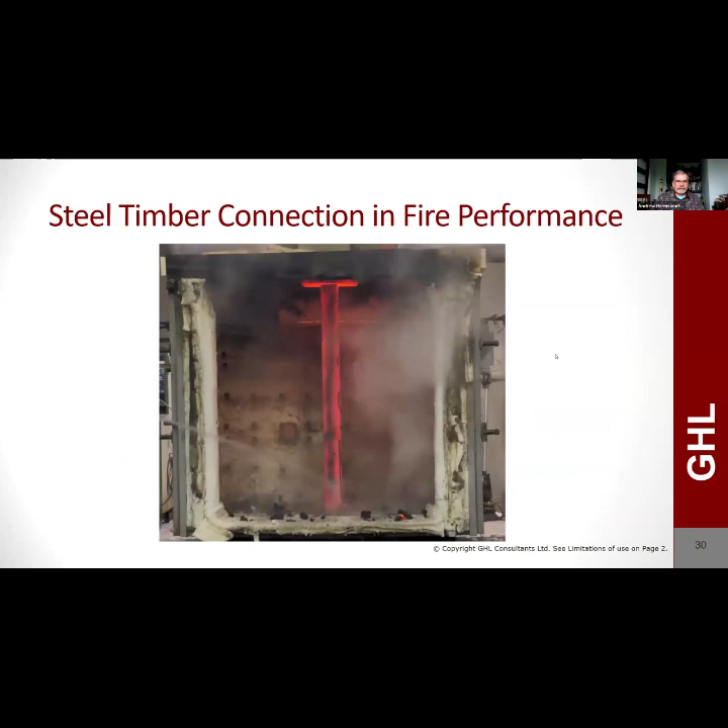Here's an example of a test furnace with a steel column supporting a CLT floor. Go through there, and at the end you can see the amount of char you get on these. Effectively there was a 3-ply CLT, and we had 2 plies left at the end.

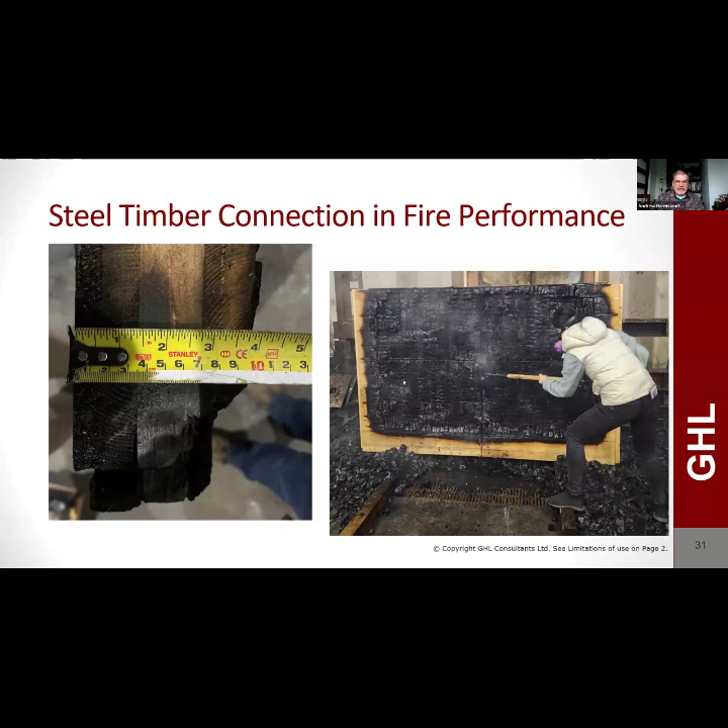Here are a lot of comments about fire stopping. There are lots of fire stop solutions out there, although many people are not aware of where to find them. We have been involved in excess of 40 different penetration fire stop tests. Some companies have some solutions, but they certainly don't cover all solutions. You almost always need someone with familiarity with timber to help you work through the fire stop designs.

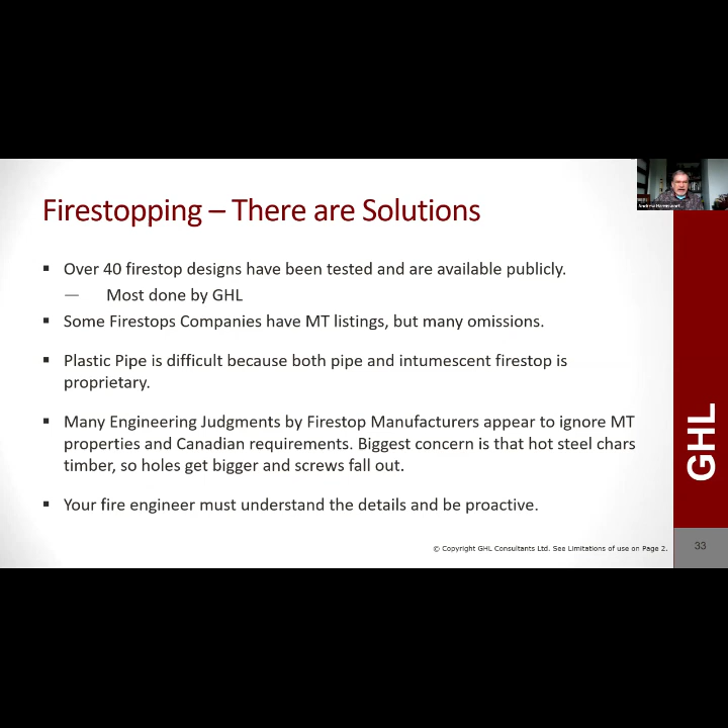Plastic pipes are very difficult for fire stopping because the pipe and the fire stop are proprietary, and the relationship between the two is very important. We do have a problem with many of the fire stop engineering judgments that we see. They ignore the fact that timber burns, for example, and a hot steel pipe touching the timber will cause the fire stop to fail. So you need a fire engineer who understands what's involved.

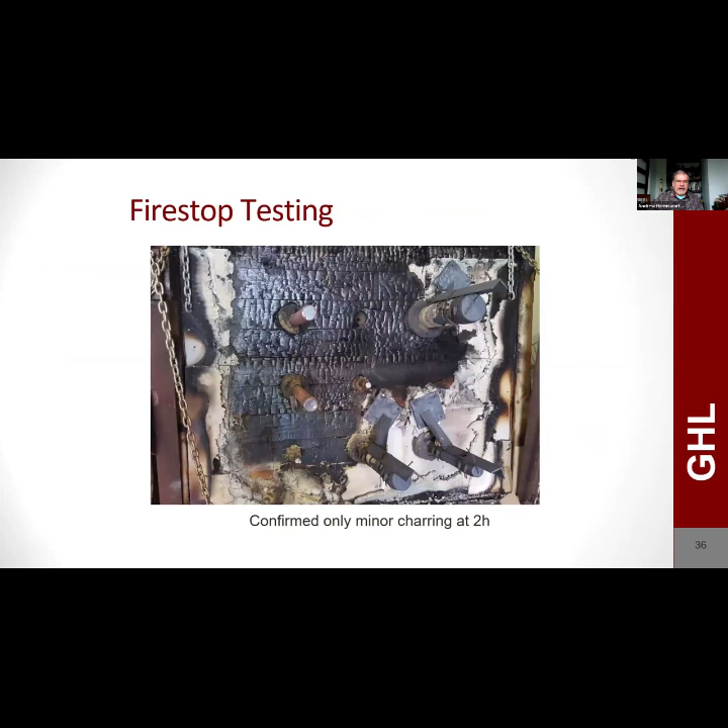There's a sample of fire stop testing. Another example here, this is from Brock Commons. We had 2 layers of drywall protection, successfully fire stopped the timber.

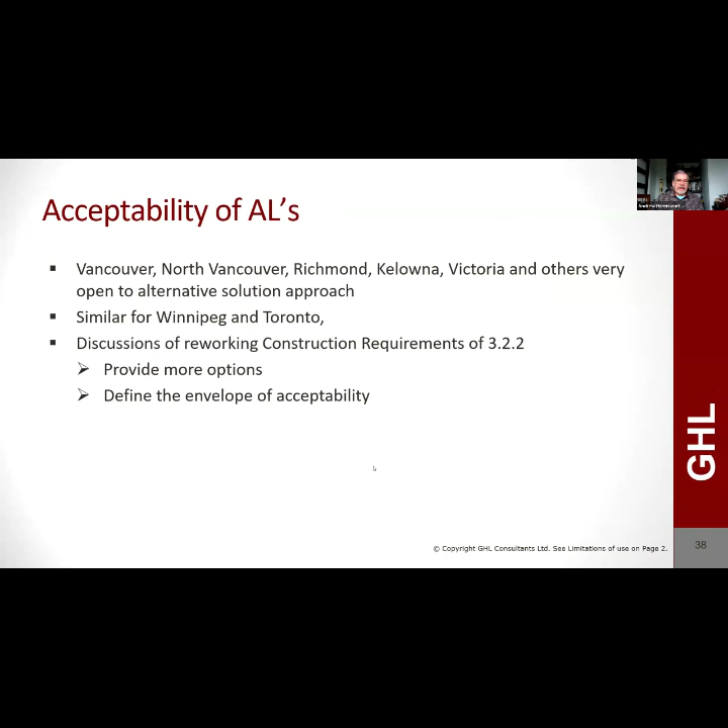Speed of construction: I really don't feel the speed of erection is currently factored into costing. 3+ floors per week on a simple building is certainly done with multiple small teams. Speed of construction is always hampered by other team members' expectations. You find a lot of the subcontractors schedule their projects based on what they expect from a concrete building, or what they expect from other timber buildings that haven't gone well. You need to make sure they integrate and understand the speed of construction.

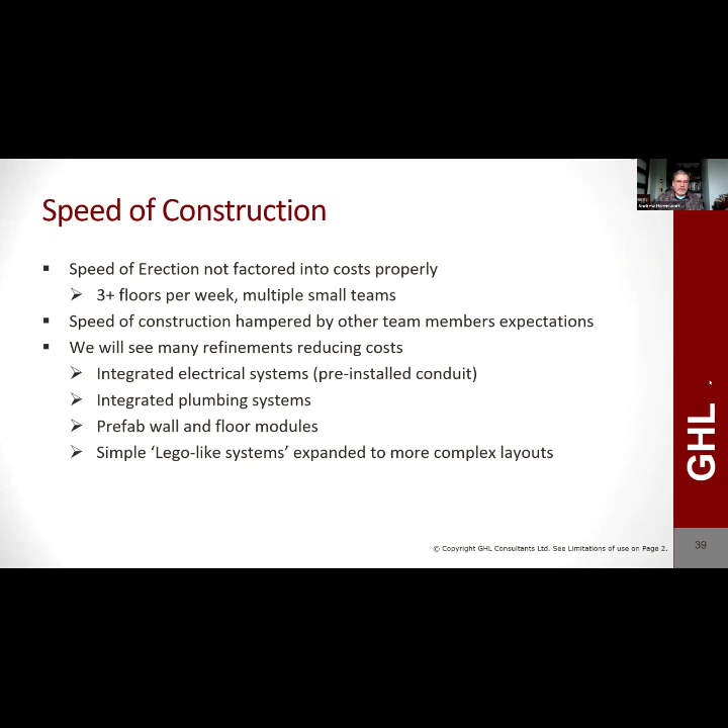We will see a lot of refinements as they get to know it. We should also see it facilitate more integrated electrical systems, plumbing systems, wall and floor modules. So Lego-like systems will be the solution.

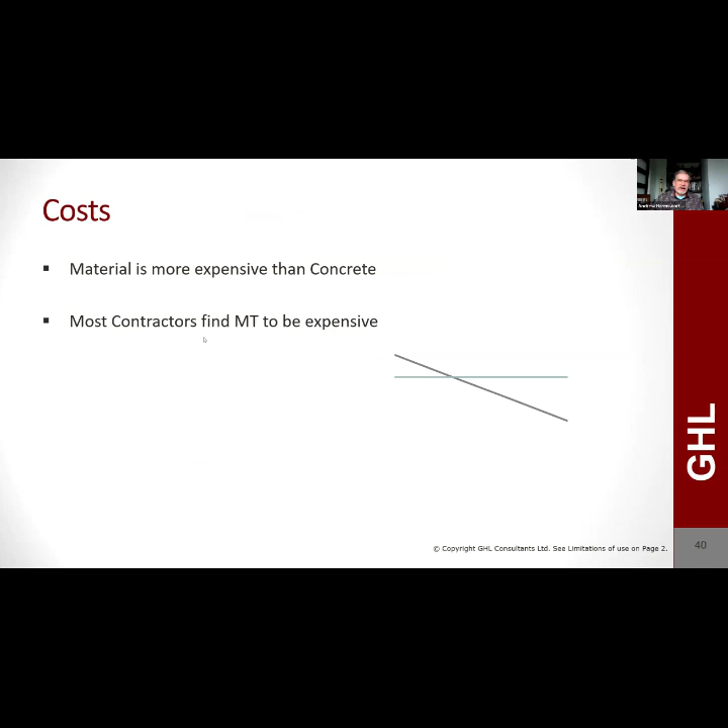Material is more expensive than concrete. There's no getting around that. Most contractors find mass timber to be expensive. We consistently see an upcharge, although we consistently see that subcontractors, and people may look at the structural materials in detail, but the impact on subcontractors is rarely assessed, and it's typically just an upcharge on what a concrete building would cost. However, in the 6-story area, we see 2 developers who are finding efficiencies.

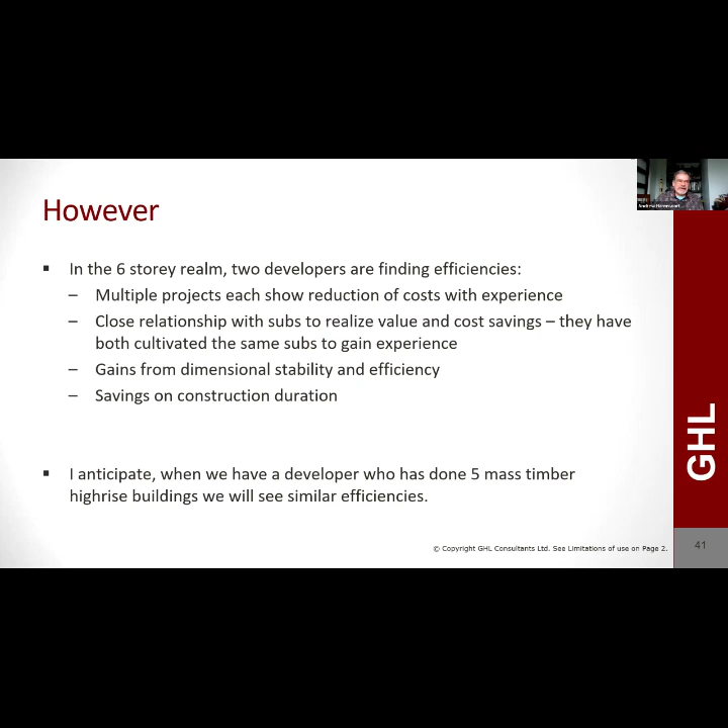They've both done multiple projects, which show a reduction of costs with experience. They both have close relationships with their subs to realize the value of the cost savings, particularly plumbing, electrical, insulating trades, so they understand how to work. They've gained cost savings and speed and efficiency through dimensional stability and significant savings on construction duration, which also translates to savings on construction insurance costs. So I anticipate that when we have a developer who's done 3-5 large mass timber high-rise buildings, we'll start to see the cost decline significantly more, but we're not seeing that yet.

Design cost is innovation, as Angela said. All consultants need to develop new details. All consultants have a wide range of details for a conventional concrete building, conventional wood frame building. You have to reinvent those details for a mass timber building, and find a good fire engineer so you're not hindered by code restrictions and lack of familiarity. And with that, I'll pass it on to questions. Thank you.